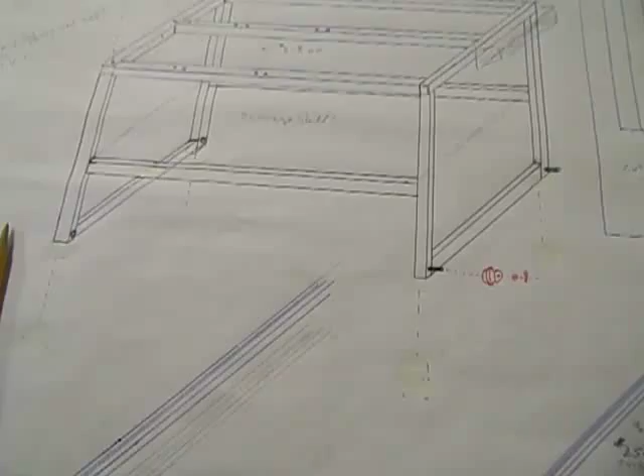Okay, it's recording. Good morning, Sam. Shane. Picture's worth 1,000 words.

I thought, hey, I'll take a quick video, and that way I can get some text and context at the same time. So I was just sketching some basics here.

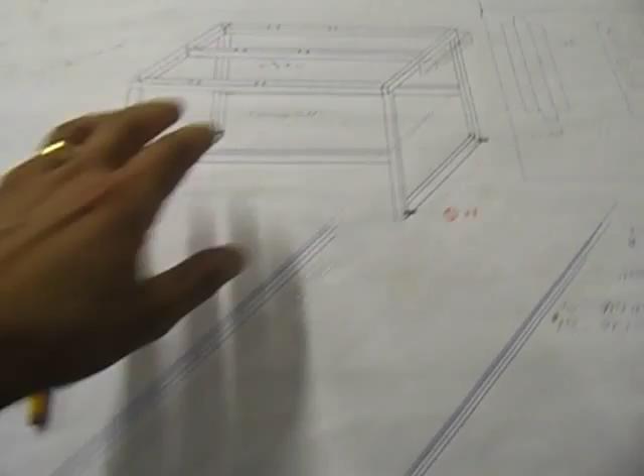If I remember right, you have two rails. If we go with a table style, which seemed to be what you were leaning towards, or I took it that way, I think that makes a lot of sense. I'm trying to envision myself being the one who's using these and building trusses. I think it'd make great sense.

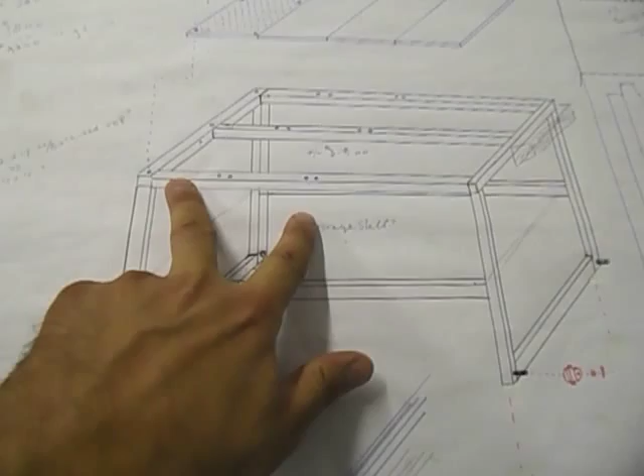You take a basic, whether we build it as a 2 foot by 4 foot, obviously it needs to be approximately the 4 foot for between your sets of tracks. I guess that's up to you. 2 foot by 4 foot, we could allow the tops to cantilever out over. We could still go with a 4 by 4 top, or maybe you just want to stick with a 2 by 4 top. I don't know what that would mean to your guys.

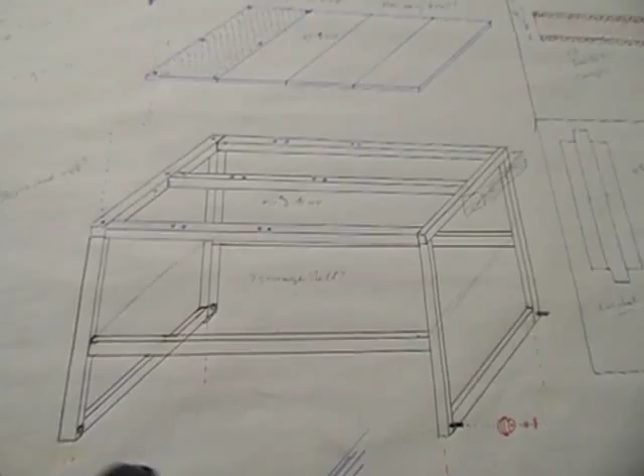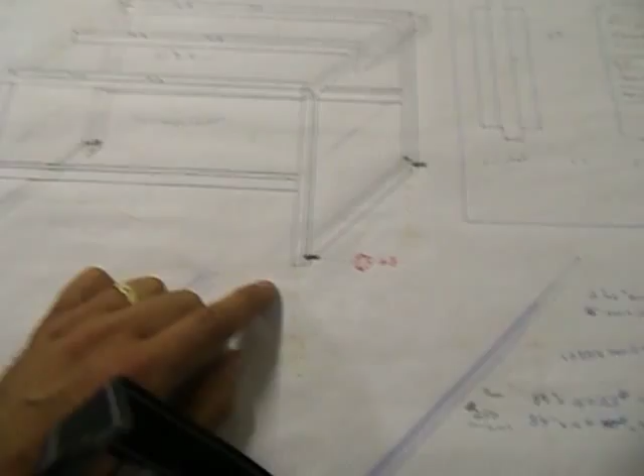4 by 4 would obviously be a lot more stable. I'd keep the frame real basic. This is not a final detail, these are all just real quick sketches to get something worked out for you. Obviously, we're early in the quoting stages, so I don't want to burn up too much time into it, and I want to see where you're feeling to go in the proper direction. Keep something basic, a simple stud out the side for putting a wheel on so that it mates up with the rails, and then whatever braking system or assembly we need to use.

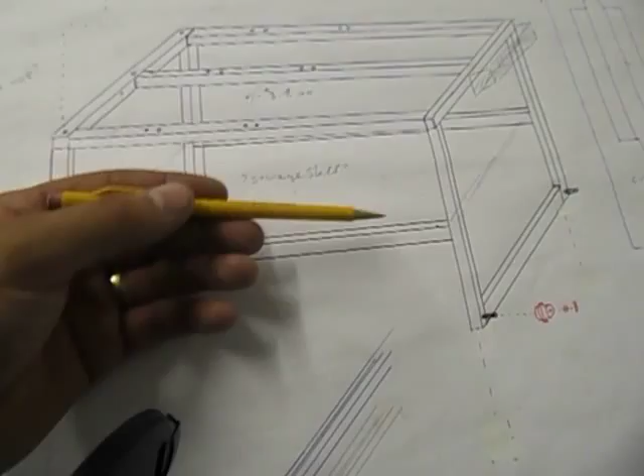We could also, when we build you the table, the one benefit I thought of was possibly either a shelf underneath, or you could even get into maybe a small hopper on the side. I don't know what kind of supplies your guys need while they're working. If they're using gussets, maybe that's a great storage area for keeping your guys efficient. Fasteners, whatnot, tools.

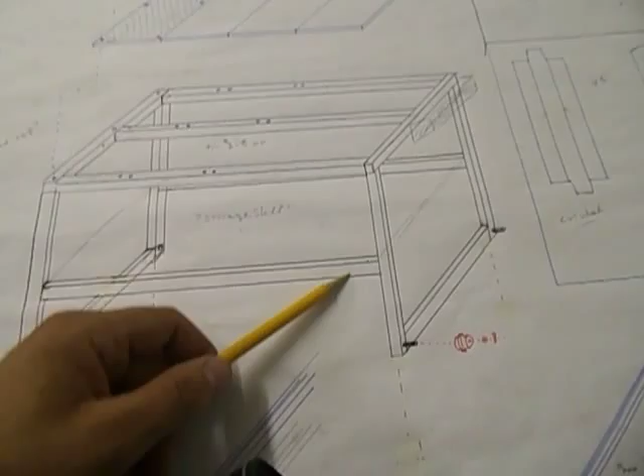So yeah, just a basic frame, and we could work out the details as far as locations of the weld points and the actual dimensions. It's neither here nor there at this point.

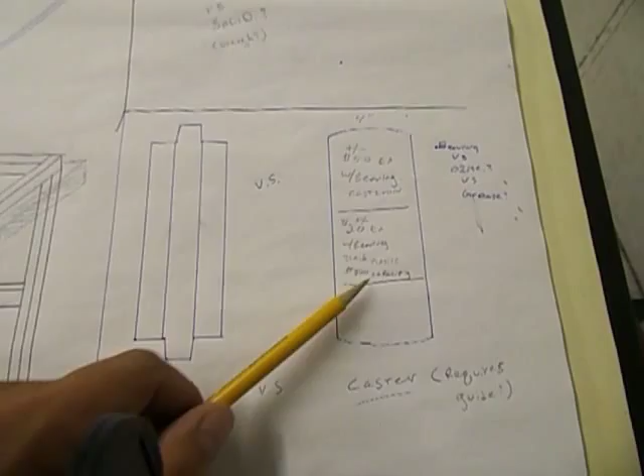Casters. For a wheel system, we could either go with a cut wheel, cut something to shape that would match the groove and dimension of your unistrut, or we can buy pre-made casters. That's definitely going to be the more cost-effective point. Just buying a slug of 4-inch steel, even mild steel, is probably $60 a piece without even cutting them or putting a bearing in yet. We can buy a cast iron or cast steel caster with bearings in it for $50 from McMaster.

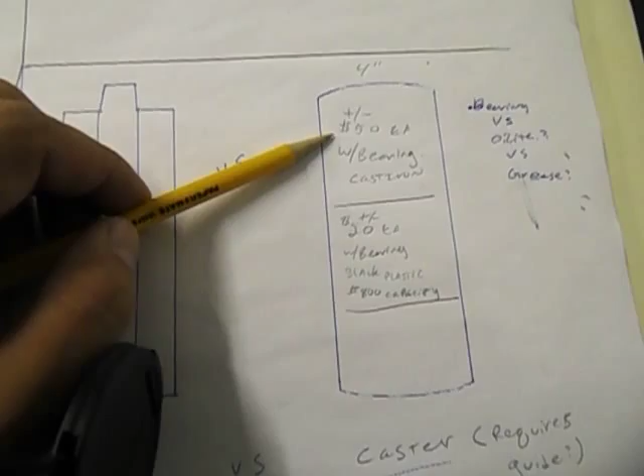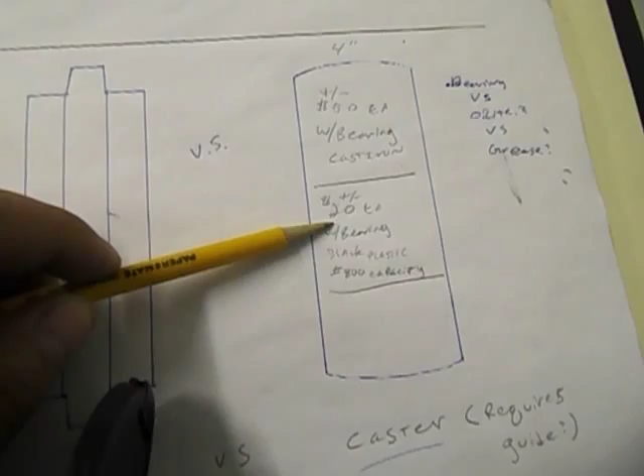Or we can get a black plastic one for as low as $15-20 a piece. I don't know where you're feeling with that. Obviously, that's going to make a substantial difference, times 4 per cart. You're at $80 versus $200. So where would you want to go with that?

The plastic ones, we're looking at about an 800-pound load capacity per each. So I don't know where your total load's going to be on this with your product that you're building, your trusses, as well as the total weight of the unit.

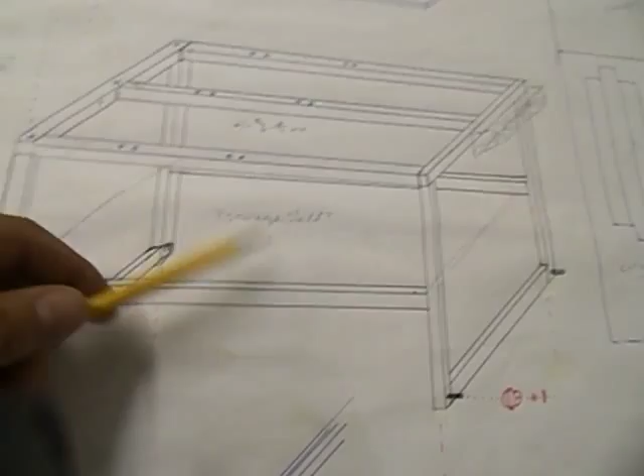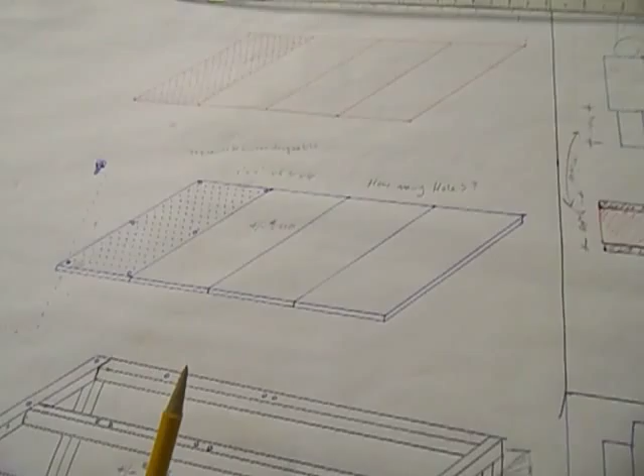Getting back to the total weight, you were talking about using, if you do this, obviously you want to put a series of holes in, and use some sort of a cam locking clamp. I don't know what thickness you need there, 1/2 inch or 3/4. I'm guessing probably not less than half. 3/4 would seem to me ideal. 3/4 inch or 1 inch brings up the weight issue.

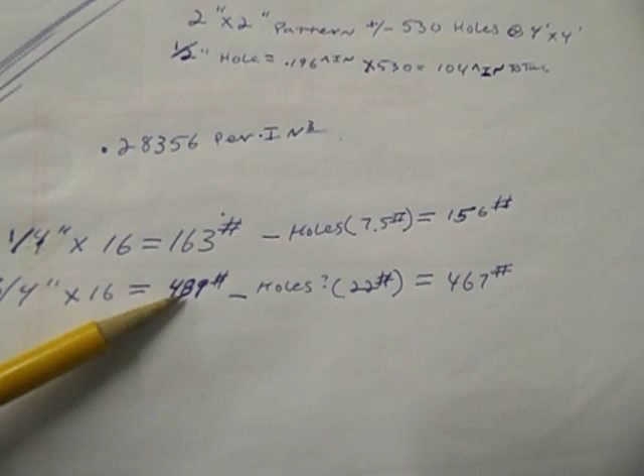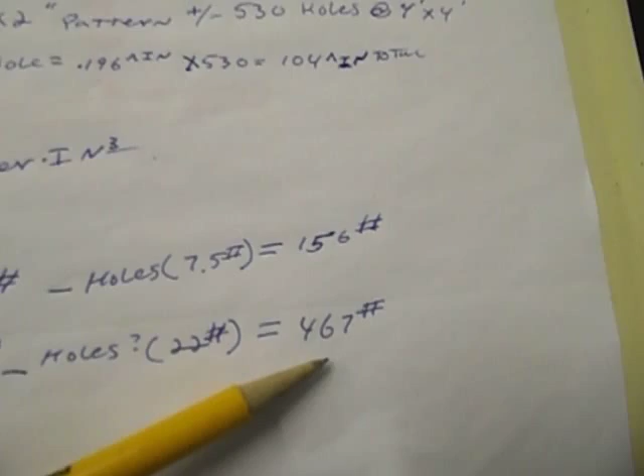Okay, so a 4 foot by 4 foot platform at 3/4 of an inch is going to weigh you just under 500 pounds. If you drilled your holes at approximately a 2 inch by 2 inch pattern and used a 1/2 inch hole, you're only going to save about 22 pounds. You're pressing that 500-pound mark for that top.

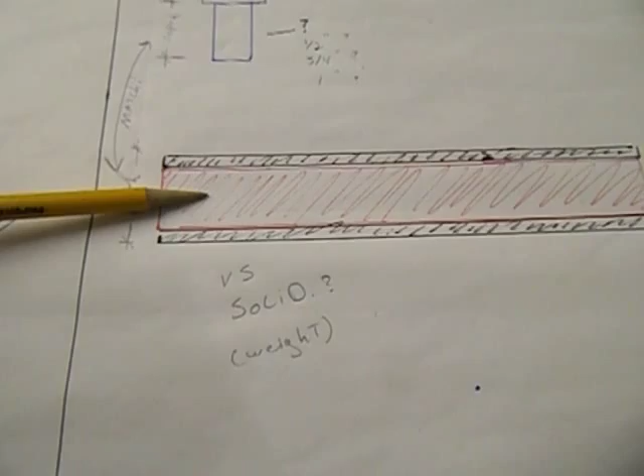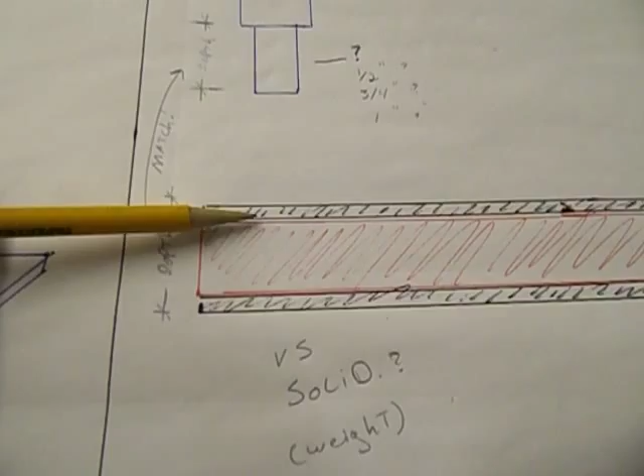If you use the solid steel, again, that's a solid steel 3/4 of an inch. My thought was the possibility of using a sandwich. So maybe you'd start with an 1/8 inch top, 1/8 inch bottom, and compressed MDF filler, something light, some compressed wood, or maybe even some plastic. The reason for that being that your clamping forces, the pressure is going to be at the low spot and at the high spot. I don't know if this would work for your application, but it definitely would make a huge difference on the weight.

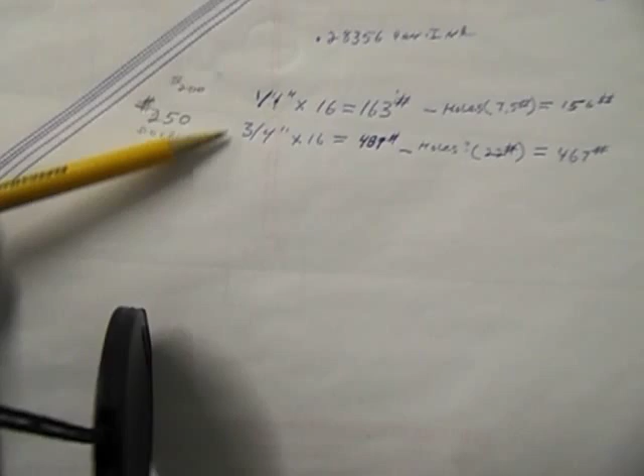Again, if you made an 1/8 inch sandwich with an 1/8 inch top, 1/8 inch bottom, 1/2 inch in the middle, that's a total of 1/4 inch worth of steel on your top, and now you're down to 163 pounds. So from a weight standpoint of your guys pushing or moving these around, that might be beneficial, even just, say, for example, freight to get it down to you.

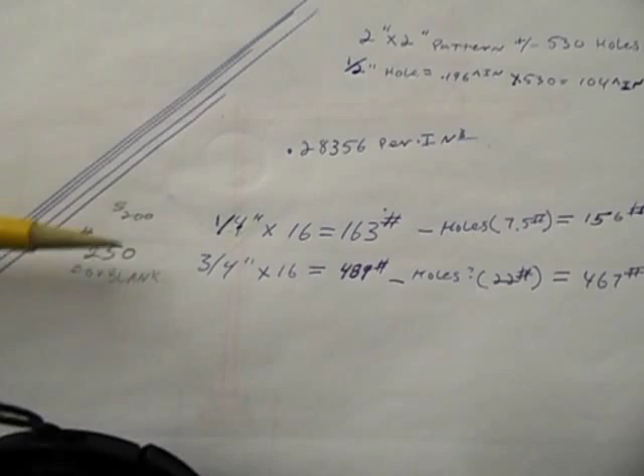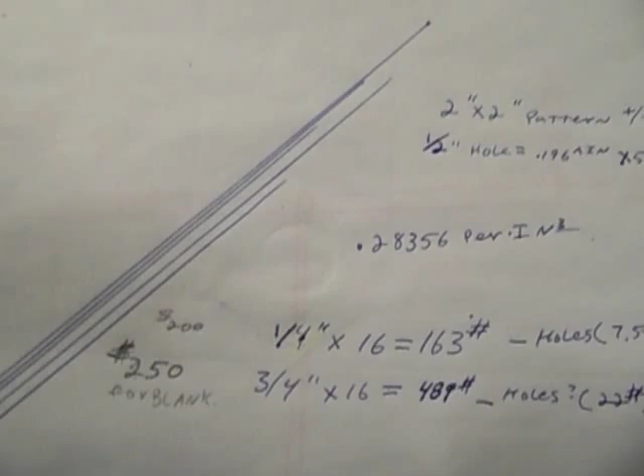That might be a savings, but not a real huge savings money-wise. You're somewhere in the vicinity of $250 for a 4x4 blank of 3/4 inch steel. Until I get 2 layers of 1/8 inch, you're going to be at, give or take, about $200 just for the blank steel, without any holes or machining on it. So I don't know that I'd look at that one from a cost standpoint, more from a versatility and weight standpoint for you guys.

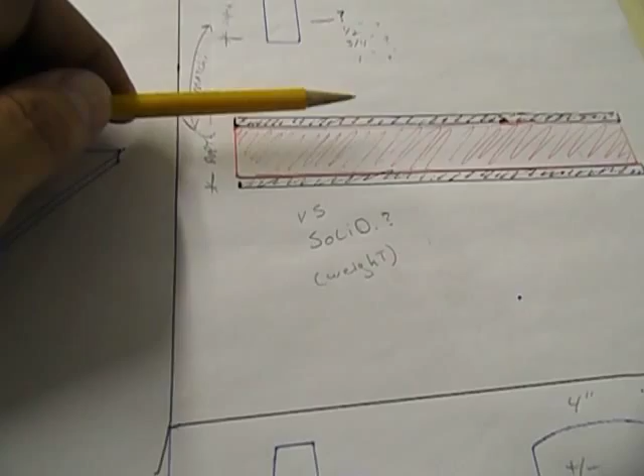Also, it would save some drilling through 1/8 inch versus 3/4 of an inch of steel. That would save us some machining time.

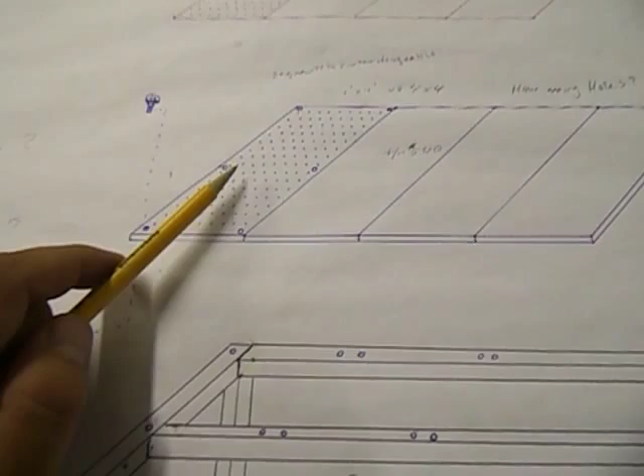All right, so then we'd also need to determine what pattern. I don't recall if you specified the pattern of the holes, your spacing - is it a 2x2, is it a 4x4? 4 inches by 4 inches is what I mean. So we definitely need to talk about that, to get an idea what kind of time we're going to get into, to get obviously a hard number.

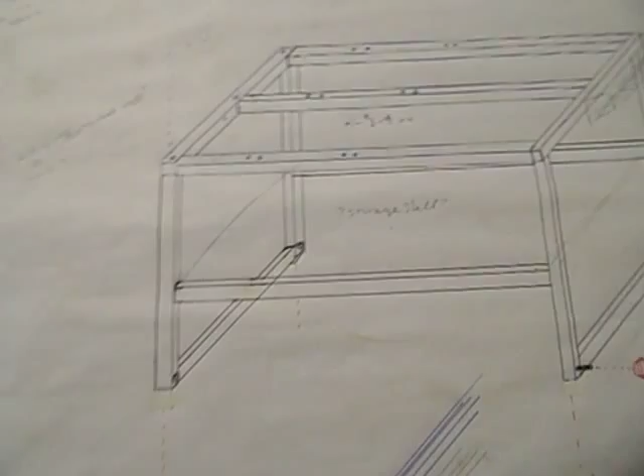Then there's the braking mechanism. Trying to think intuitively here - I don't want to overthink this, or at the same time underthink it for you. I know you've got a system now which I understand is a foot pedal, so the brake is either unlocked or locked, and your operator locks it into place by pushing down on it, and it stays locked until he does something. I didn't see your mechanism though.

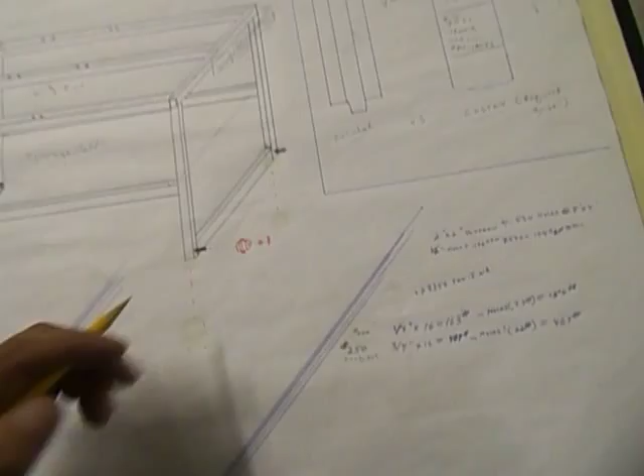I don't know if we'd be able to get away with locking the wheels themselves. If the top is heavy enough, if you go with a solid steel top, you may just be able to use a simple wheel lock and lock the wheels.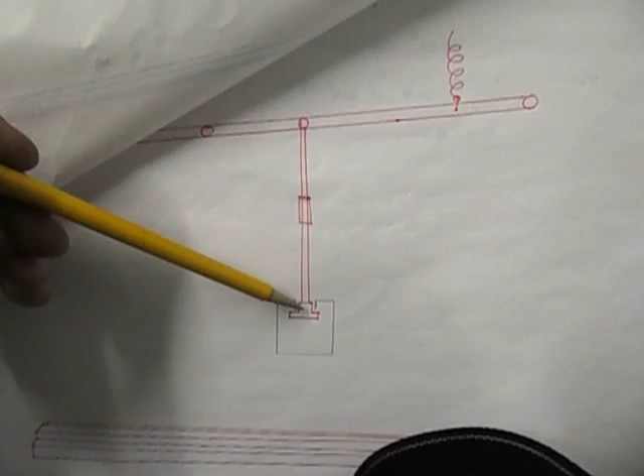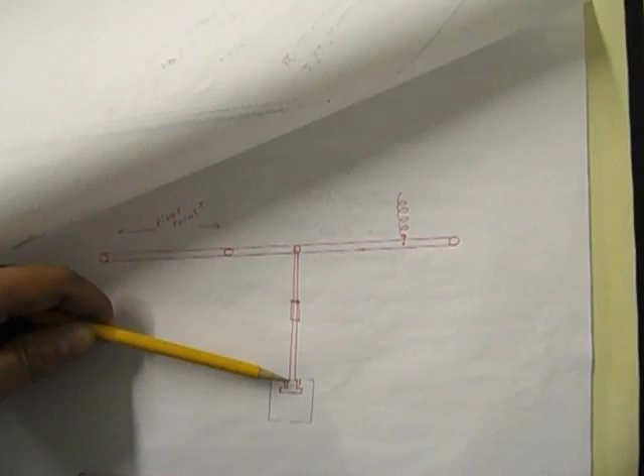Or we could do something similar to what you had before, which I think is something along these lines - you've got this shaped shoe that, whenever he depresses or presses the pedal, locks it in place. I had a thought of utilizing a lever system. Think of a lawnmower, the safety stop for your push mower. The brake would have a spring somewhere in the system, probably out towards the handle, that keeps constant tension on the shoe, so the brakes are always locked until your operator is ready to move them.

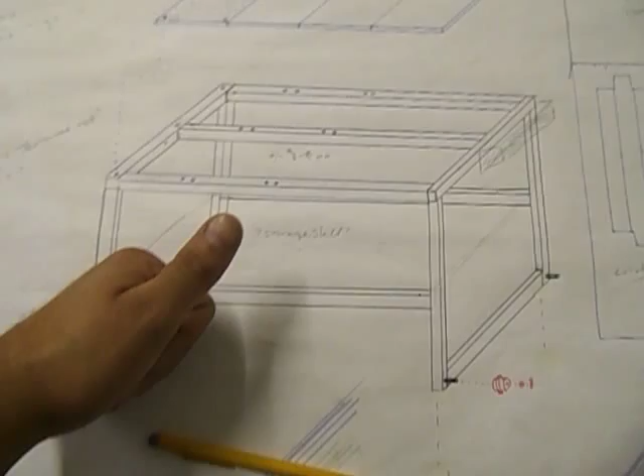So in essence, he would be standing along your table, and he would push down with his hand, and that would unlock the brake, slide the table to wherever he's going to slide it to, then release his hand and release the brake - that sets your brake. Your brakes will always have constant pressure, so you're never going to have operator error, whether your operator forgets to set the brake, or oversteps on the brake lever and bends it, etc. So I think there could be some benefits to a system like that.

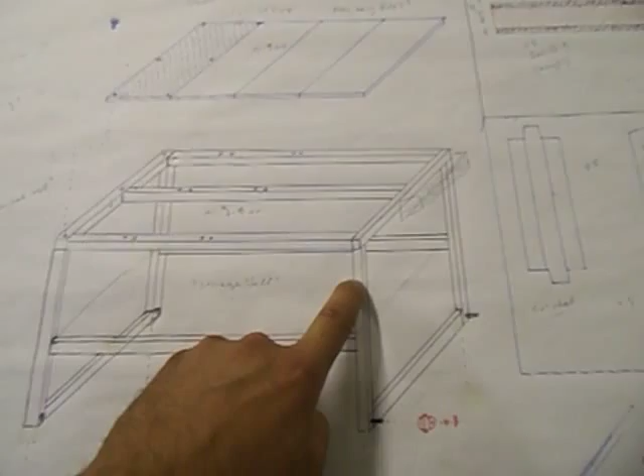In essence, you'd have a bar with hinges here, and your operator - if this is your main operator side, or the outside of your table - would push the handle down here, and the handle rod may come down through the framing underneath into your unistrut. I think a system like that... I kind of like that idea. You may or may not. You can let me know, and we'll work around whatever it is that you want.

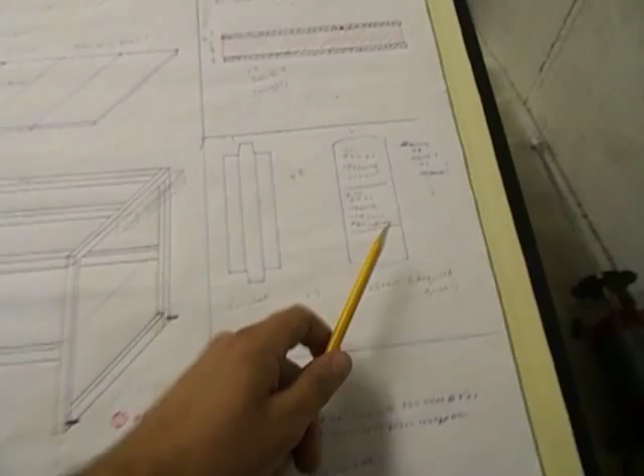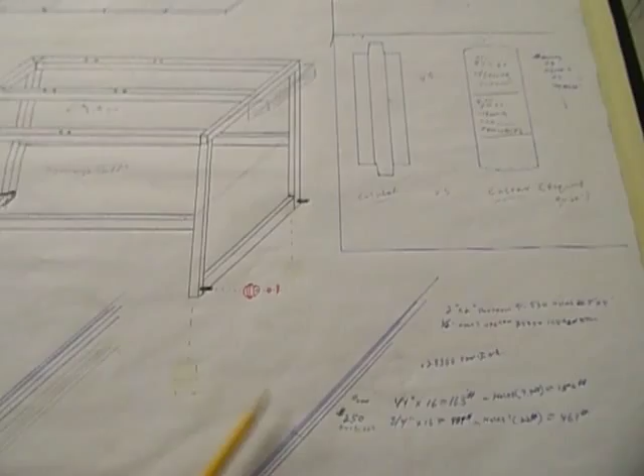If we go with the caster style wheel, back to that, we would need some kind of guide, whether it be a simple chunk of steel welded down that slips into the rails to keep your tables on track, or we could possibly rely on your brake as that. If you've got a brake that sits down into your unistrut, by limiting the total distance it can travel down, so it never travels past the sides of your rail, if that makes sense, you could possibly use that as your guide to keep it on track.

Your typical steel caster is going to have probably the least amount of traction, so that's going to make it easier for whatever guide system we use to help keep it in line. A plastic wheel may have a little more bite, by biting into nicks in the paint, etc.

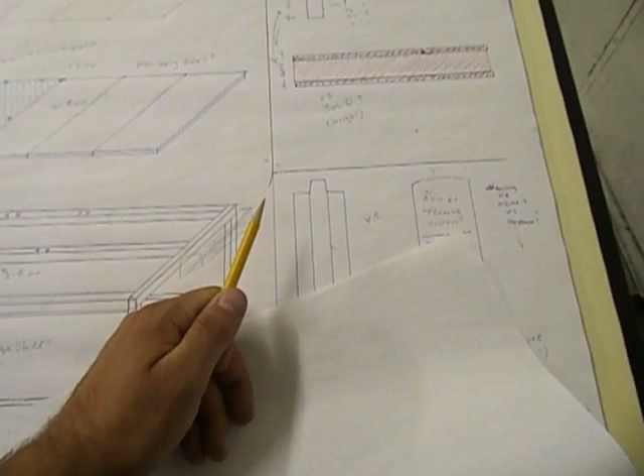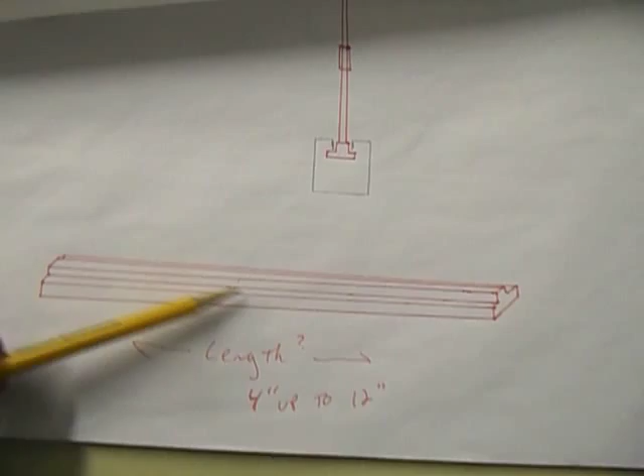But there again, the other option would be to go with either a wheel that we could buy with a shoulder on it - you're probably going to see about $60-80 per wheel if we get into that - or going back to a cut wheel. I don't know that we even need to go down the road of a cut wheel, I'm just tossing that out there for you. If we'd use that brake shoe as the guide, I think you'd want to make it a little longer, maybe 12 inches or so.

I don't know how you're set up down there to be able to slide those in from the end and assemble these tables as you mount them on.

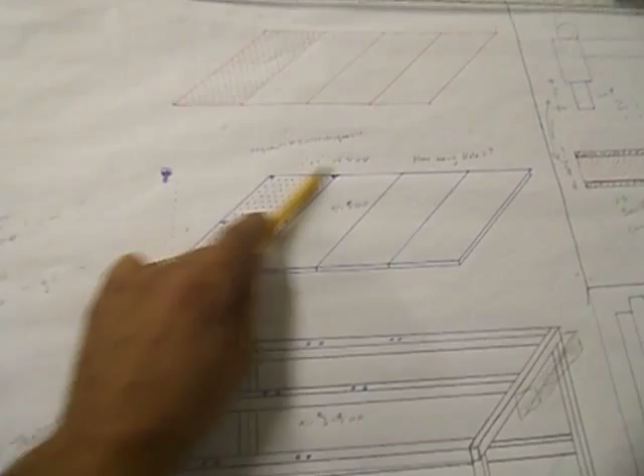Back to the top here, we could build the tops as one solid piece of 4 foot by 4 foot. That makes it a one-piece top, with less machining.

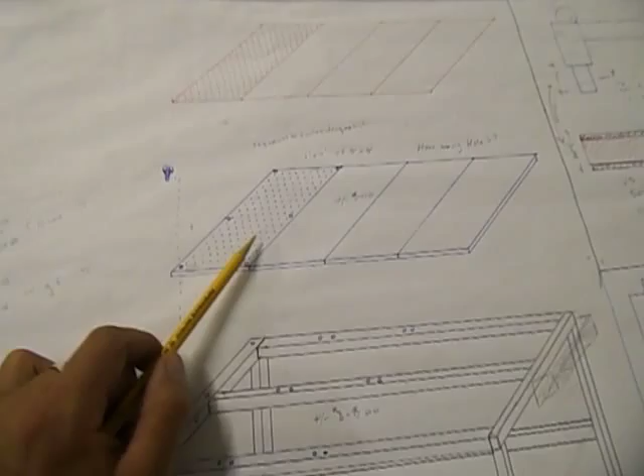Or we could cut these out as a 1 foot by 4 foot, or maybe even 16 inches by 4 foot, which would give you 3 segments. The benefit to that would be that down the road, let's say your guys tend to operate in this area of the table for whatever reason, and you very seldom use this other area. By cutting it into segments, you could make these segments reversible both directions. You could rotate them end for end and now have a new set of holes, or you could even flip them over and again have a new set of holes. So that would give you a long service life.

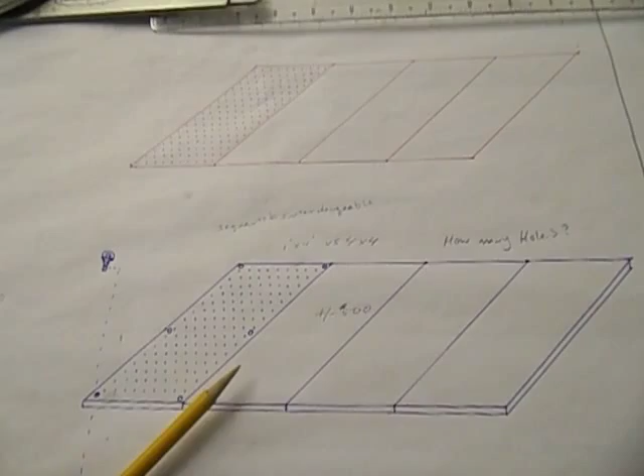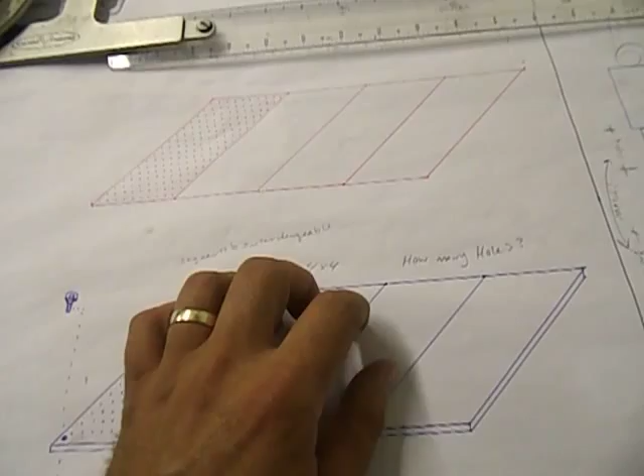Whereas if your guys tend to work in this area of the table, because maybe that's how it works out with the measurements of your trusses or where you put the gussets and webbing, then you're limited to how many times you could flip and rotate. We can always align our holes so that you can flip and rotate your surface regardless of the size, but making segments gives you more versatility for service life.

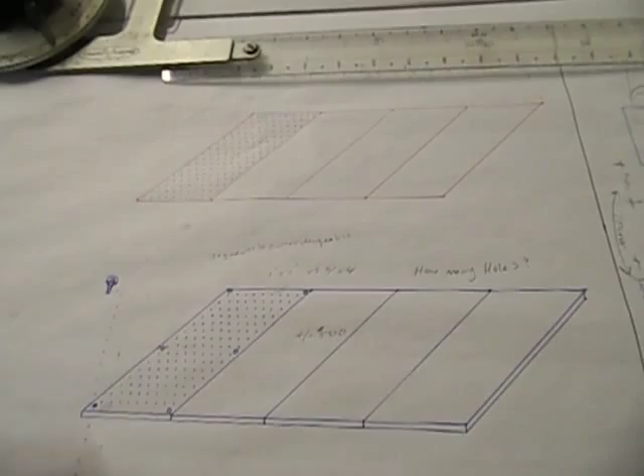That's not so much a material cost factor, but it does make a difference in having to drill more holes and making sure everything is aligned so you can reverse and interchange them with each other. Even being able to swap one from this table to another table in your system could be of value to you. That's up to you, again.

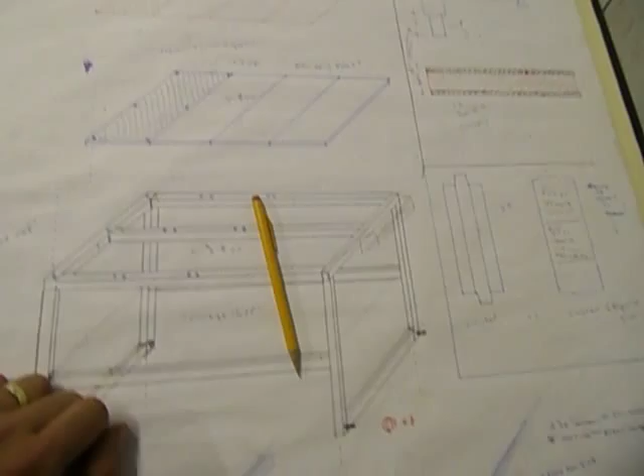And then just obviously countersunk screws into the base. It's really simple. If we go with a 4 foot, I think you're going to want to put a support in the middle. Again, that's a minor detail.

So that's kind of the basics of what I've got in mind for a design on a table. There's a lot of variables as far as how you want to go about the braking system. My thought would be to build one table.

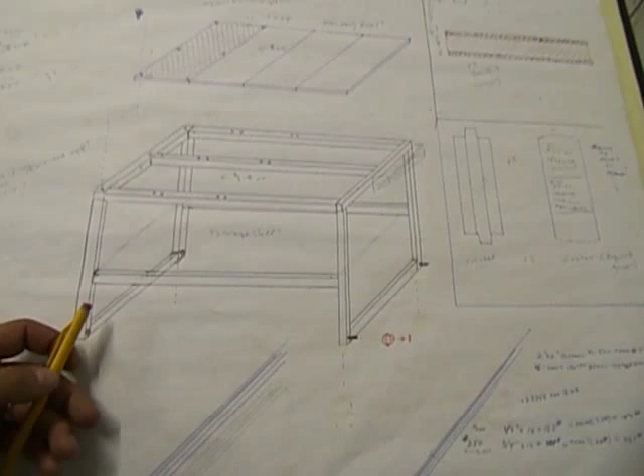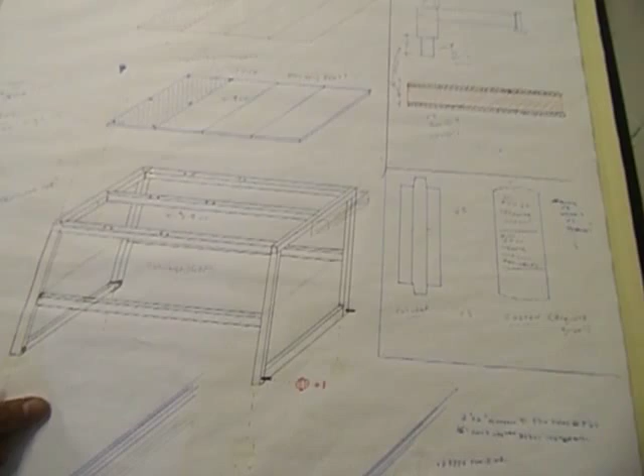I'd set up some unistrut, make sure and get me the dimensions on the unistrut that you have so I can get something that matches. I'll set myself up a temporary unit to design and build your first table off of, ship that table to you, and then you can give your pros and cons, let your guys use it, and get back with me if that's something you want to do.

And if we end up doing business together, that's probably the way I'd want to go about it. I'd rather not make, is it 12 or 24, I'd rather not make 25 or however many tables that are wrong for you, obviously.

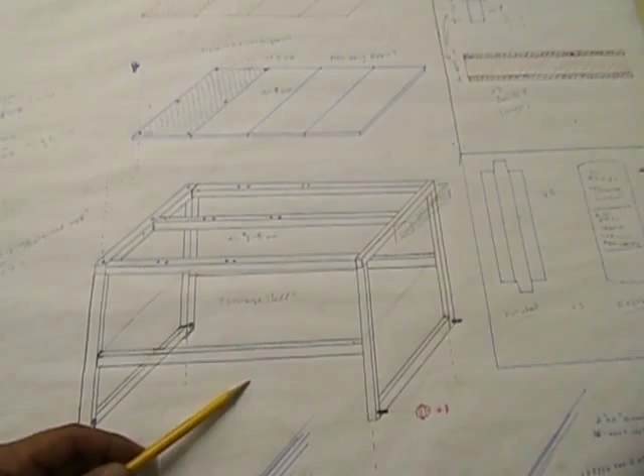From a costing standpoint, I'm picturing your base unit, just your main frame and base, painted with your studs, I call them your axle studs, probably in the $300 mark, maybe $500. I'd say if we're ballparking it, go $3 to $5. I realistically think if we keep it nice and simple, $300 should be real accurate.

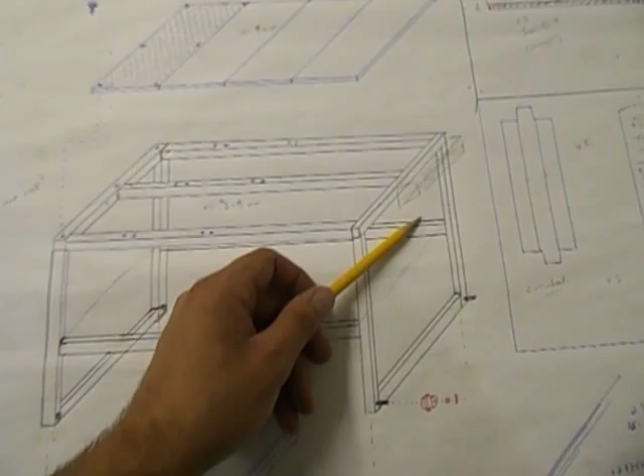If you want to get into adding a storage shelf down here, or a hopper or a tray somewhere, I think that still keeps us within range. We could even just give you the framing brackets, and you could put a wooden shelf down there, it doesn't need to be made out of the same steel as on top. Again, that's a conversation for down the road. So your base frame is probably $300 to $500.

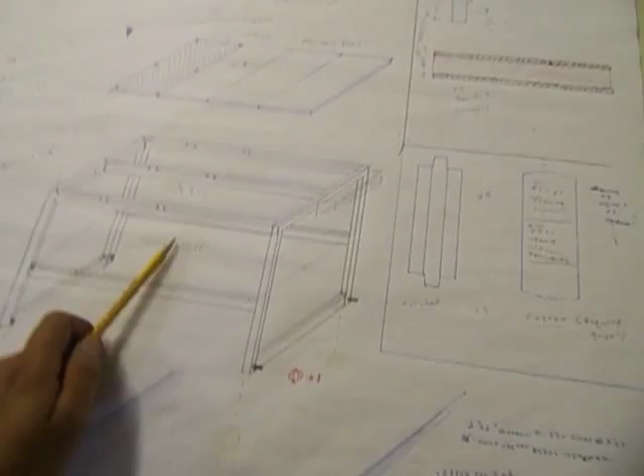Then where do we go with the casters? Do we go with the plastic casters at $50 a piece, or $20 a pop, or do we get into cast iron? Where do you want to go with that? Obviously $50 a piece versus $20 a piece makes a couple hundred dollars difference. So you throw a brake system on the casters.

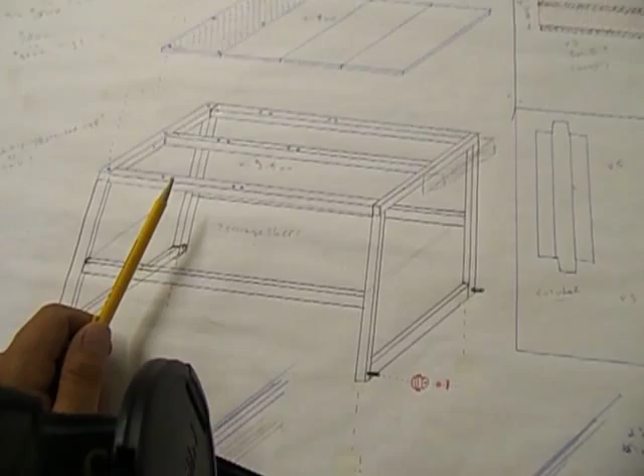I think we're looking at somewhere between maybe $800 to $1,200 on the base with wheels and the brakes, and then get into the top. Again, are you another $500 into the top?

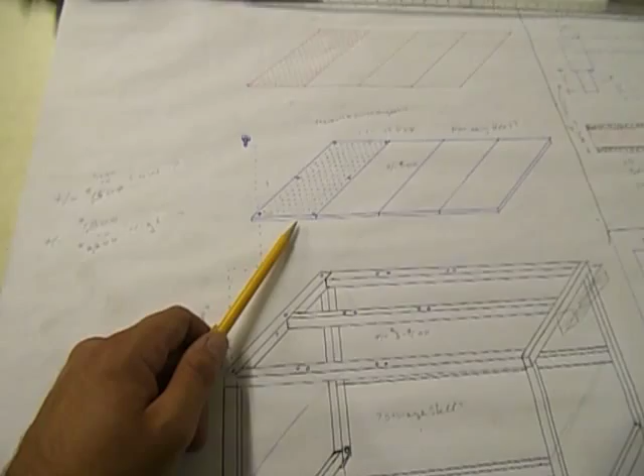How many holes are we putting in, all of those variables? Obviously, a 2-inch by 2-inch pattern is twice as many holes as a 4-inch by 4-inch pattern on your drilling. So I would need to know that before I'd put too hard of a number in.

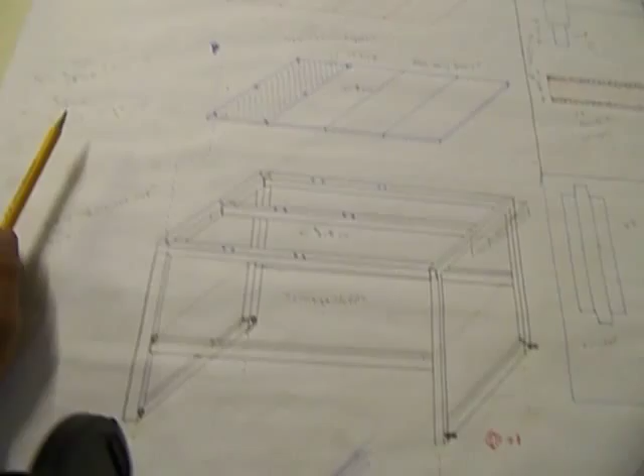I'm thinking realistically on a low number, something real economy, basic. We keep the design simple and usable. I'm thinking $1,200 to $1,500 per unit on a low number. I'm probably going to end up close to that, realistically. As a high number, $1,800 to $2,200.

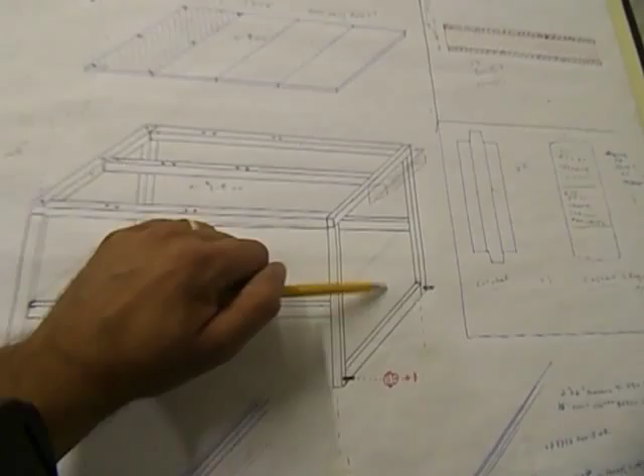And there again, do we get a shelf on the bottom yet? How do we go about that braking mechanism? I'm thinking you could run that handle mechanism where you're probably going to need to brake on both sides. You could even do that by means of a handle on this side that runs across and back onto this side, so it's one handle in the middle that unlocks both brakes for both sides. Maybe you tell me you only think you need one brake on one side—hey, we'll do it from that angle. But I think that's a pretty healthy number range. That gives us room to have a conversation and continue talking on Tuesday.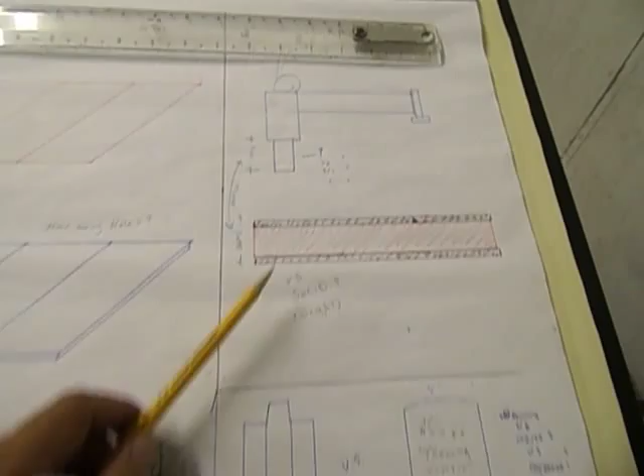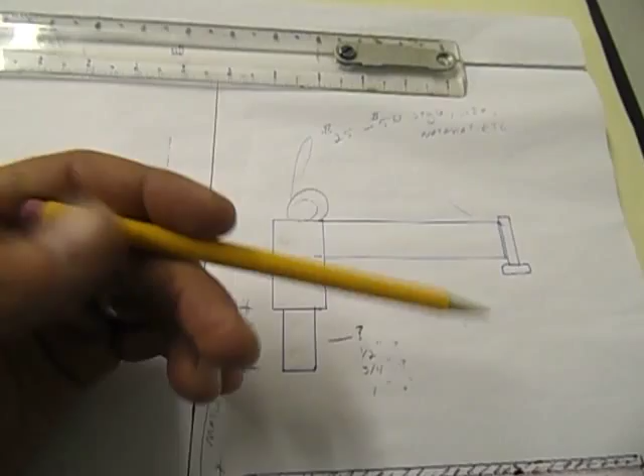You get into your clamps—I don't know what, we never had much discussion on that. That's obviously something I could build as well. I don't know if there's something on the market already that someone else has come up with a design for that already works with your dimensions for your gussets and so forth. I don't know what you exactly need there. I have my idea, but that may be far from reality. I don't know, but it would be something with a clamping bracket out here.

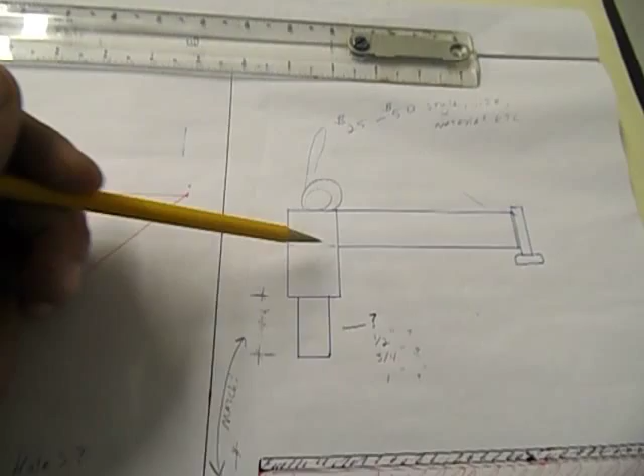You could make something with a little lever cam out here, or maybe a big wing nut. There's a million and one options. How simple do you want to keep it? How inexpensive do you want to keep it? Building something real basic like this, I can imagine something in the $25 to $50 range a piece.

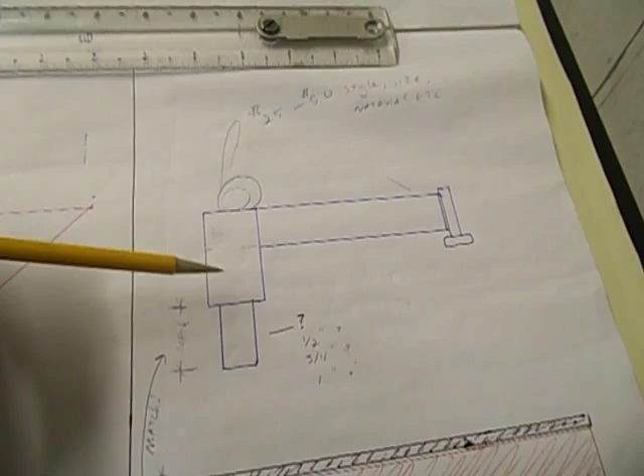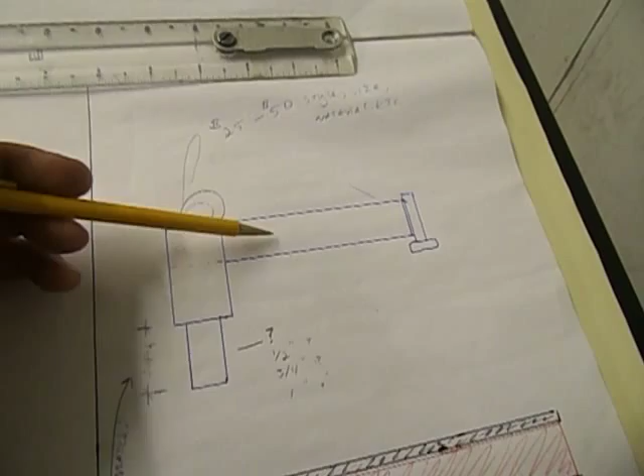Do you want to build them out of aluminum so they're nice and light? If aluminum is strong enough for the amount of clamping pressure you're using, maybe a steel stud for your base, and then an aluminum bracket. The leveraging bracket could be out of aluminum, where your main meat is of material—keep it light. Again, strength versus weight and cost factor for you. Aluminum is a little easier to machine, but it may not have the service life you need. We can have some conversations there. You hadn't necessarily requested that, but I know it's part of this whole system you're trying to implement for your shop, so I'd be glad to make something along those lines as well.

All right, I think that pretty much sums it up.

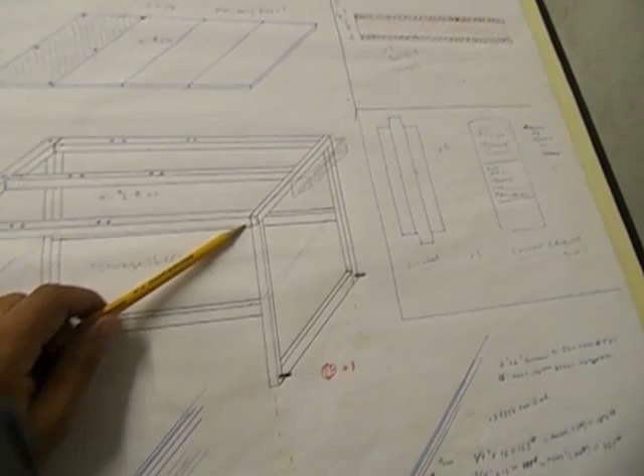Again, you can get a picture for the weight. These things, probably no matter how you dice it, with your frame, your wheels, and your top, you're going to be in the vicinity of about 300 pounds—I would guess 250 to 300 pounds. If you go with the solid steel top, 3/4 inch solid steel—or it's even going to be heavier if you go with 1 inch, obviously—but you're probably going to be between 500 and 800 pounds, probably close to 800 pounds with a solid steel top. So now your guys are carting that 800 pounds.

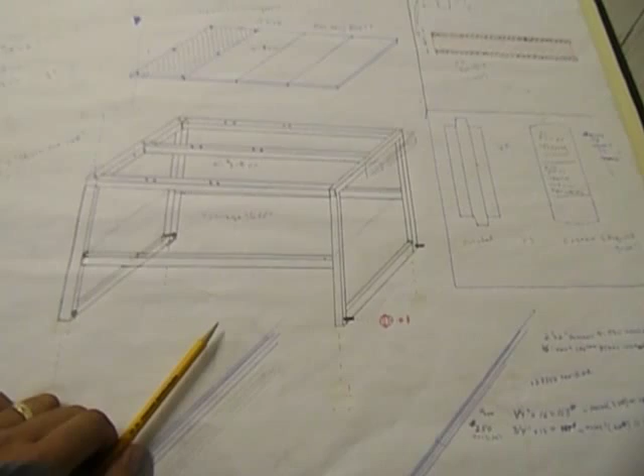From a design standpoint, I think the table is a better idea than the pedestal stands for a couple of simple reasons—the work area in this, as well as the clamps, to me that makes a lot of sense. The idea of a short wheelbase, like the pedestals you currently have, where you've got your two rails and what is it, a 1 by 1 foot base? And again, I don't remember the spacing between your sets of rails—I know they're 4 foot on the major, I don't know where they're at on the minor point.

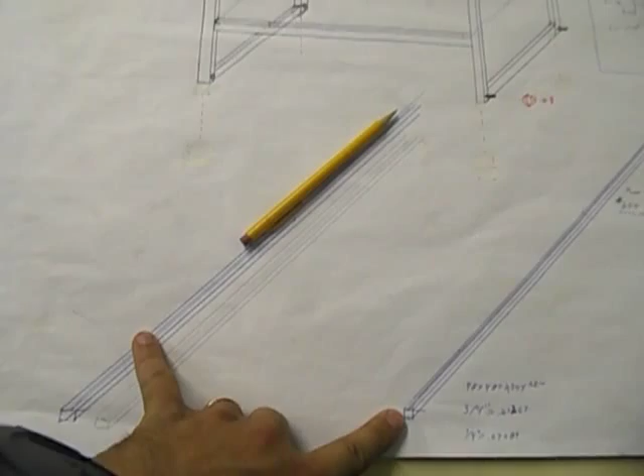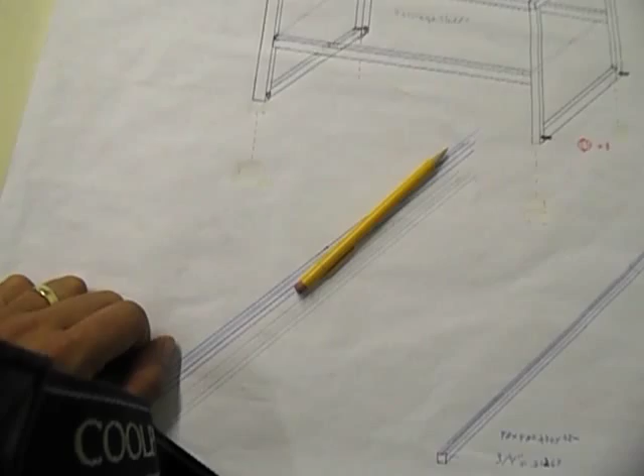But that just seems like, you come up 3 foot or waist high, 2.5 to 3 foot, but then you've got a small base—that's a lot of leveraging and racking, etc., and I think that's just another wear factor. You're going to find that in 2 or 3 years, you're probably not as satisfied as with something like this. There again, I don't know, I've not run your operation. Your guys in the field might be the best resource for what's the best application here.

Again, we could build you one table. If I do a one-table thing, I might have a higher cost factor into just that individual table for an initial test, but then I'd want to get you a sample of that, let your guys critique it, set it up on your racks. Maybe you could run that integrated with your pedestals for now and get some feedback on it—make notes, make some changes, corrections, or alterations, and then if you'd be ready to move forward, go ahead and make the remaining quantity.